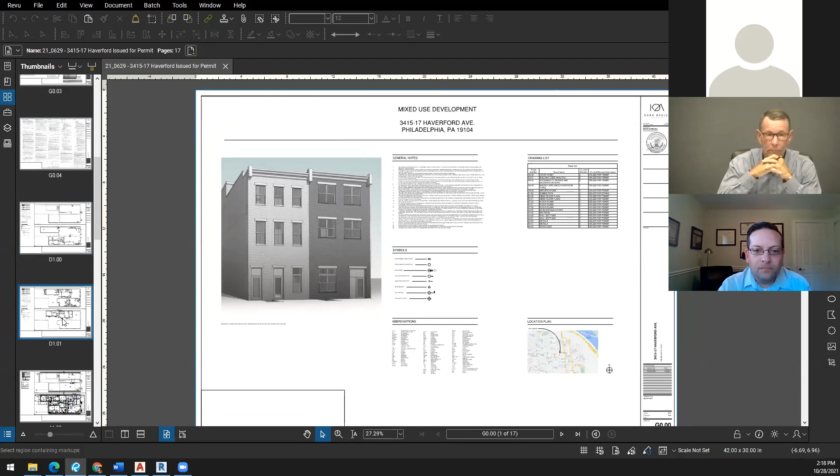I'm going to let Mark share his screen and discuss the plans. Okay, go ahead. Mark, yeah sorry, I'm getting it. All right, so everyone sees the drawings? Yes, we do. All right, so as Jared stated, this is two parcels with an existing unity of use.

What we decided to do was connect these at the first floor and independently move up throughout the building for either side on the units above. So at the first floor there's a commercial unit and two residential units. There are existing openings along what is currently a property line, but since we are using these as one parcel, we're hoping to seek relief for the windows' fire separation distance as they're shared in this courtyard.

And then as we extend up, the buildings do step away from each other further into the plan, so we do have alternating windows in that area as well.

Also, the rear yard of this property is 25 feet deep, so we do not have access to a right of way, and we do have bedrooms that open up into the central courtyard. We would say that with the sizable rear yard on this property, there's more than enough area of refuge for occupants to exit the building safely and be safe while they're waiting for rescue.

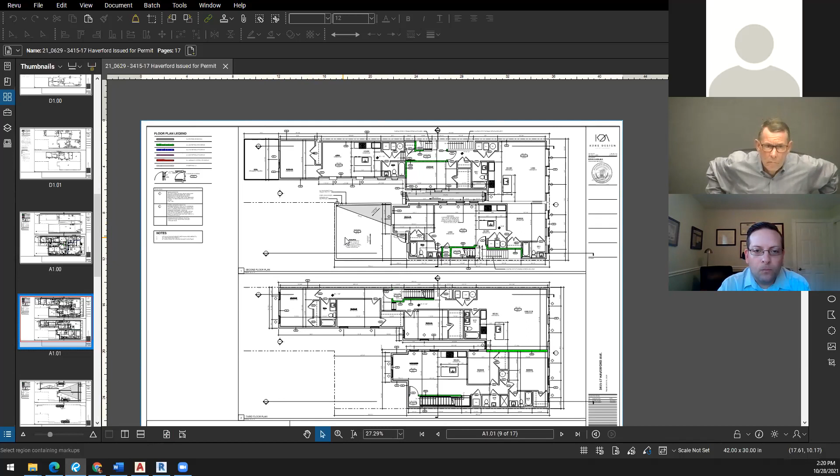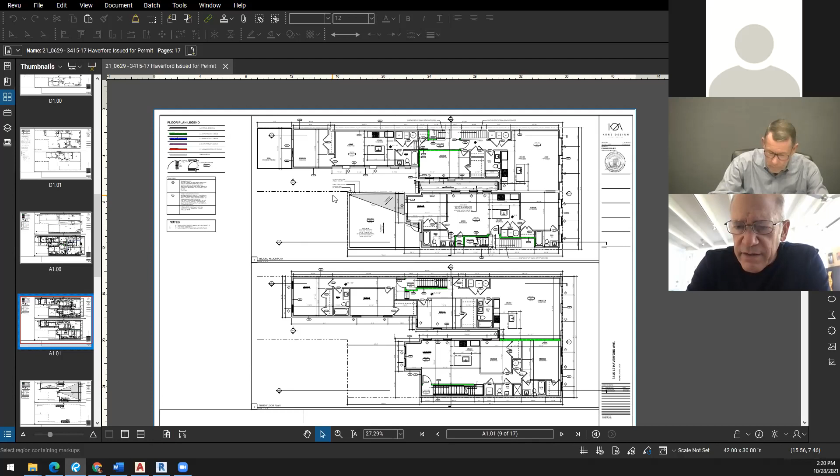Did you work out an arrangement with the parking lot to gain access? We have not. Is that something you'd be interested in, reaching out to them to see if we can maybe place a gate on the fence on that side? Yeah, and a recorded easement that allows access to that.

Yeah, we, 25 foot isn't enough. The standard's 50, so that's an issue for us.

Also, the biggest goal was to keep these buildings intact. The only way to provide access to the back would be to knock this entire building down. So the building is not currently sprinklered. We're going to fully sprinkler it in our proposal. We're more than willing to offer up extra sprinkler heads at all of the opening points listed in the refusal.

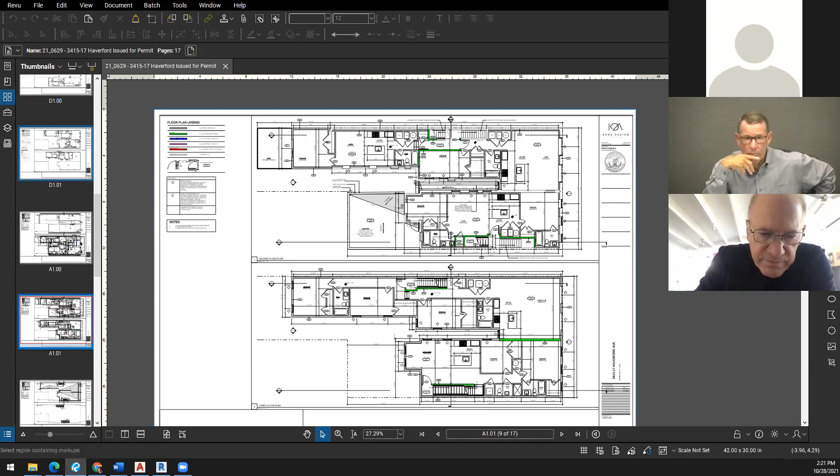Okay. Yeah, I think we're okay with the openings that are kind of between the two parcels, as long as this remains one building with unity of use. I want to confirm there are no openings that are problematic on either of the other property lines, are there? It's only the one between the two parcels?

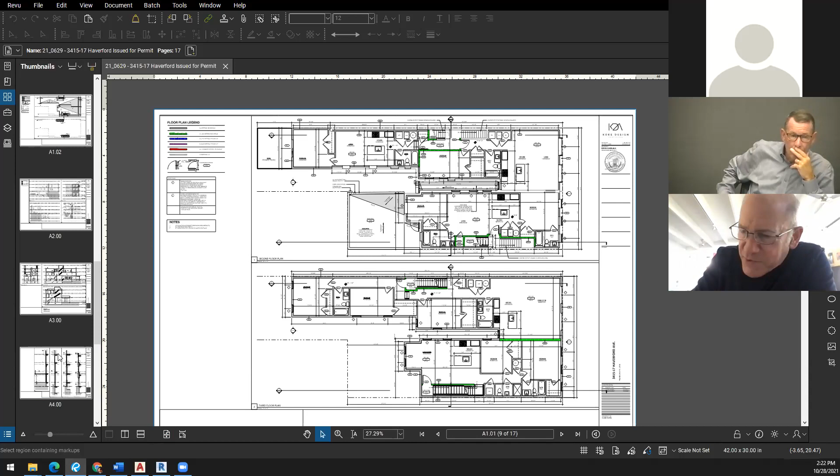That is correct, because the existing structure on 3417 goes all the way to the back property line. We have no windows along this. We do have windows along the rear of the other parcel, but again, that's a 25-foot fire separation distance. We're way under the percentage of glazing for that.

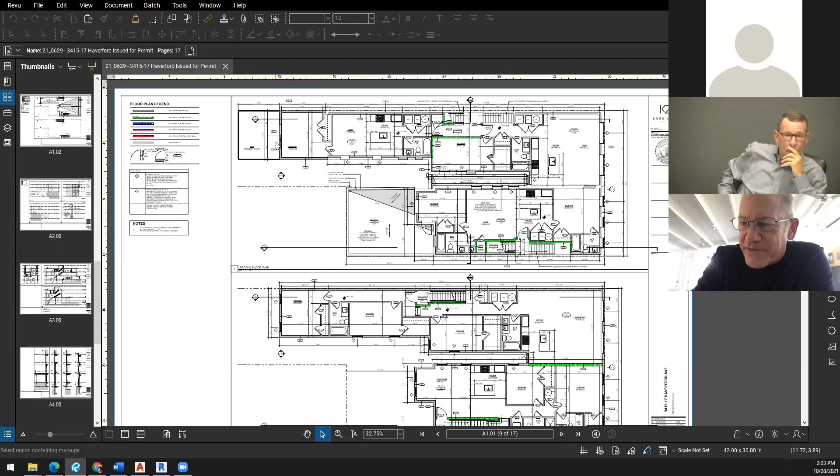I think, just going from our typical projects, we do have a concern with bedrooms dumping into the back without any way out. So I think we would have a proviso for a recorded easement to egress in an emergency through the adjacent parcel. The only thing we have accepted on occasion is allowing a tunnel, essentially tunneling back through a building where you're re-entering from the backyard and then out to the street. While that's not allowed as of right, we have typically accepted that.

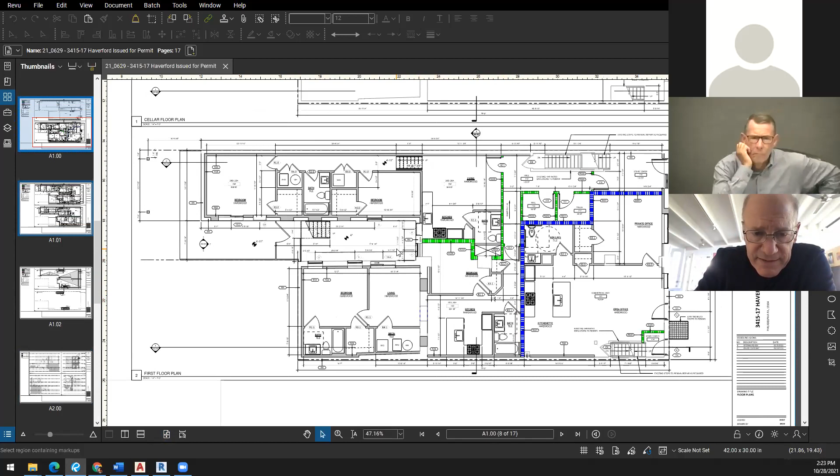We took a quick look at your plan, and that would obviously be problematic. If we were to, at this first floor, we have this 2-bedroom unit here. If we were to provide egress back through this space and into our egress enclosure through here, is that something you would be willing to consider? Still only one exit really at that point.

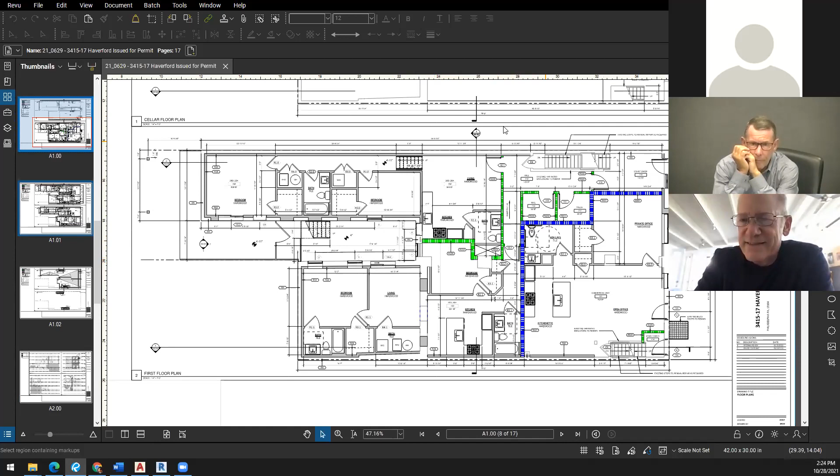We want to guard against the possibility that we'll have a recalcitrant owner of the parking lot who may refuse to give us an easement. So we'll certainly approach that owner about that, but it would be good to have a sense of what a plan B might be if that owner will just not cooperate with us.

So essentially, we would eliminate this bedroom and create the corridor all the way out to the front of the street. Could that corridor be next to the existing corridor there? At a certain point, I guess. One exit, but it does then provide egress out of that space.

I'm just wondering if that path could be isolated from the stair coming down. So essentially you're on a ground floor corridor that takes you through and out, with a doorway next to it. It's like a double loaded hallway there, right? Kind of where you have the red line, but carving out a little bit of what's there. In that case, it would be independent, I believe.

Is that true? The whole idea, Kevin, is if the stair is compromised and none of the occupants from the second and third floor level can reach the public right of way, having a tunnel alleyway that goes back into the exit enclosure to access that public right of way kind of defeats the whole purpose. So that's why Ted was stating to have a tunnel alleyway that's right next to it, as long as it's completely enclosed and has no penetration into that stair enclosure. That's what he was stating.

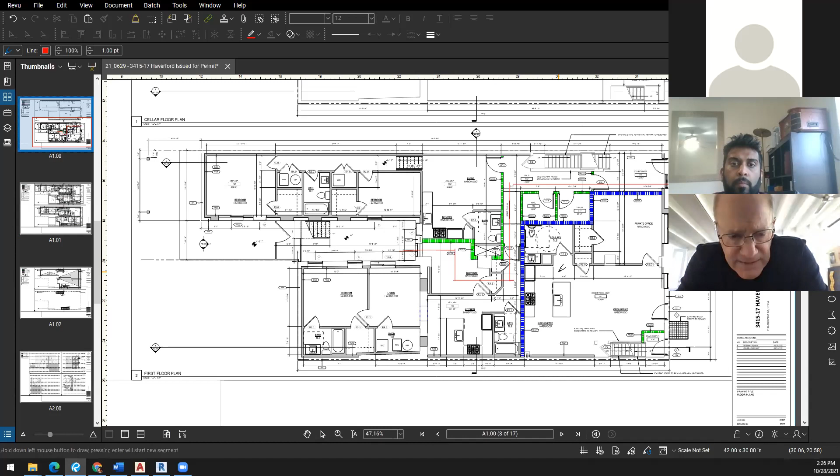Okay, sure, understood, that makes sense. Is the best process then, from an administrative perspective, to leave it open while we have that easement conversation? So yeah, we can continue it. Let's do that if you're willing, and we thank you for that. Let's do a reasonably brief continuance, and I'll reach out to that owner and see what we can do.

In the meantime, you might want to draw up plan B just quickly for yourselves, so you've thought it through. Of course. And just a process question on that: when we come back with a continuance, would we just present that plan, or would it be a new application? It'll be the same application. Right, okay, very good.

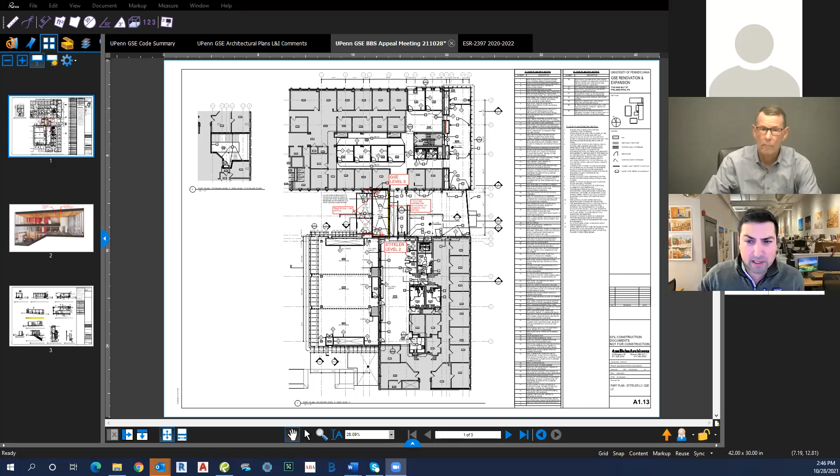Hi, can everyone see my screen? Yes, we can. Hi, like I said, my name is Josh Eisenberg, project manager with Ann Beha Architects here on behalf of the University of Pennsylvania. We also have our code consultant, Arthur Gager, with Jensen Hughes on the call, and a couple other individuals with the University of Pennsylvania. So what you're looking at here on screen is a floor plan, which includes the condition in question. The project builds an addition between the Graduate School of Education building, which is here to the north, and Stiteler Hall to the south.

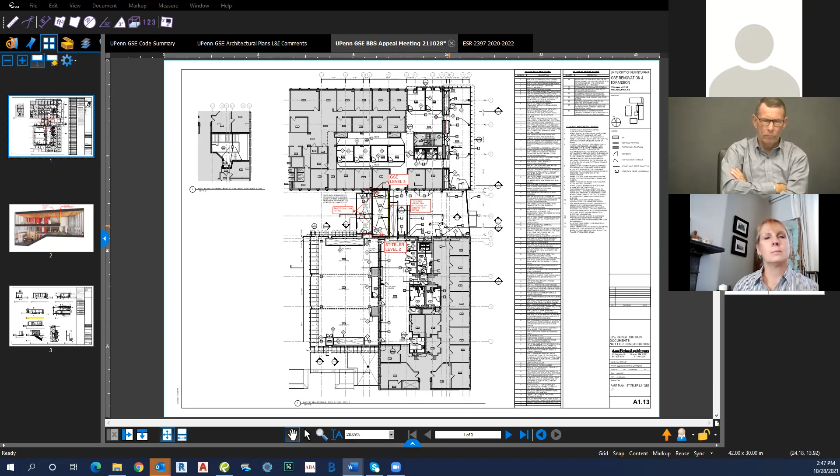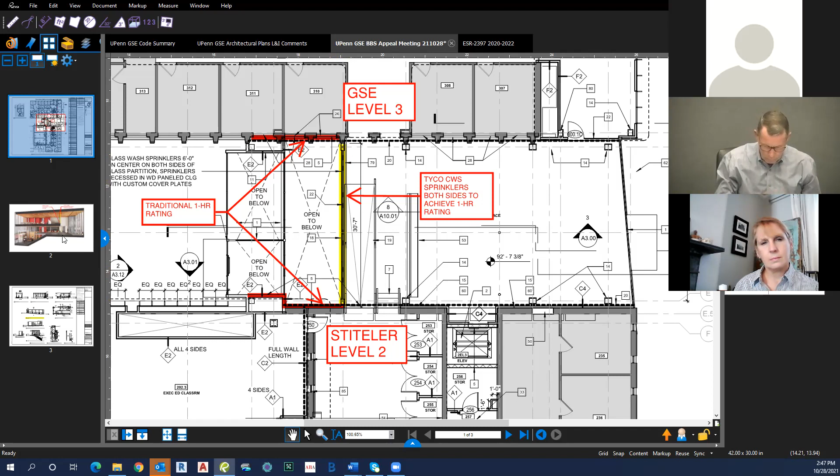So the upper level of the addition, if I zoom in a little bit, which is what we're looking at here, overlooks a double height space. And you can see two of the three walls separating the surrounding areas will be separated with a traditional 1 hour fire rating. The third here, which is a glazed wall, and this is the condition in question, is proposed to be separated with a Tyco CWS window sprinkler system on both sides of the glazing in order to achieve that 1 hour fire rating. And to give you a different kind of perspective on the condition...

This is a section perspective view looking to the south. This yellow line represents that glazed wall. The CWS window sprinklers would be on both sides of the glazing. And there's a metal rail that would essentially protect the glazing from pedestrians or storage on the floor side of the glass.

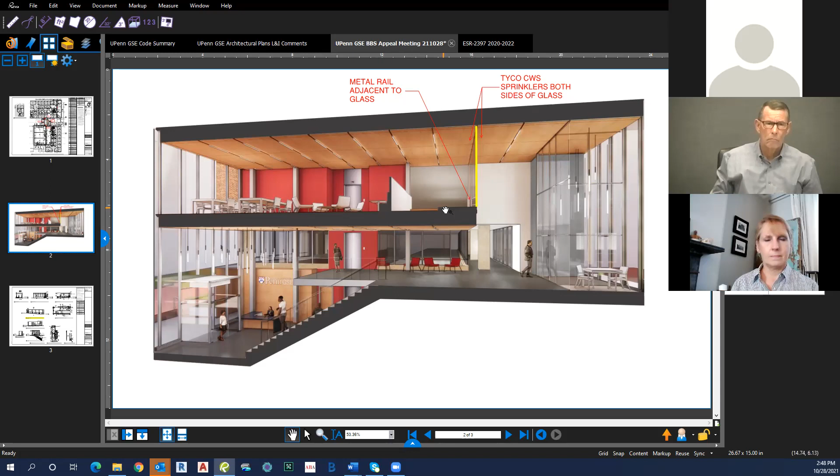And just the last drawing that we have to share with you is just an elevation of the glazing from that upper level looking back towards the glazing wall. So those window sprinklers would be on each bay in accordance with the ICC ESR testing report. And Arthur can get into, I think, maybe speak to a little bit more of the technical aspects of the ESR report, if that would be helpful.

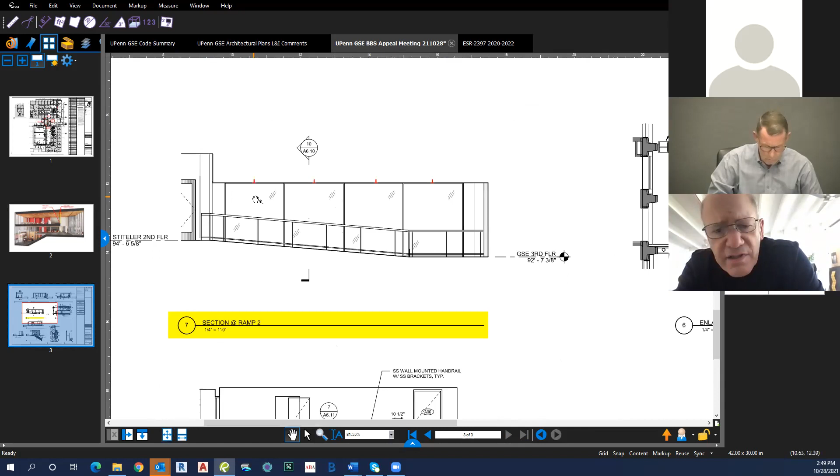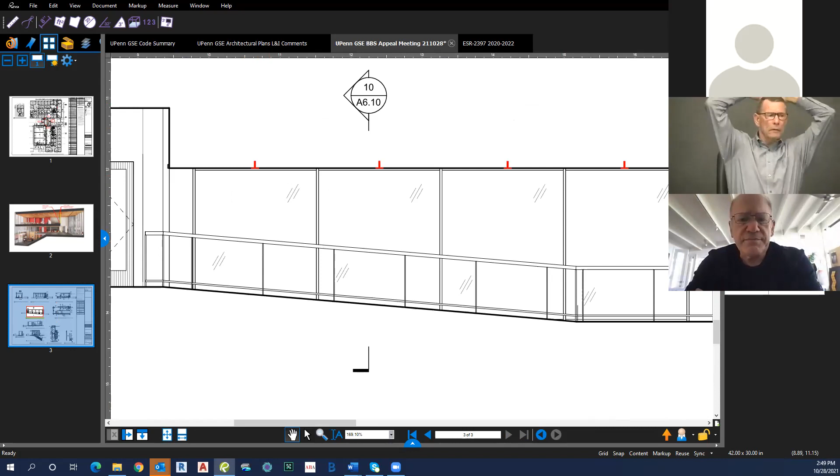Just one quick question, the 4 lights of glass there, what's the approximate width of those? Approximately, I think they're a little bit over 6 feet wide. The window sprinklers are tested basically, they require a 6-foot separation or a baffle between the sprinklers so that you don't achieve cold solder. Right, okay. Okay, thanks.

And you have them on both sides of the window? That's correct. Both sides of the glazing, that's right.

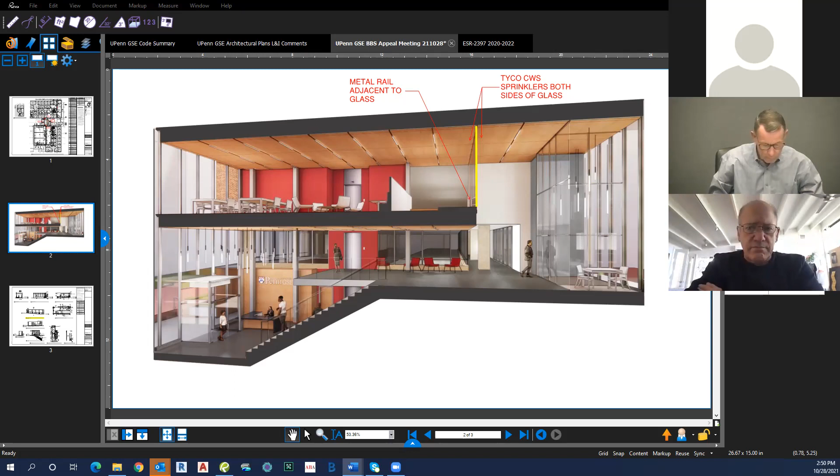Yeah, so I talked with Jay about this a little before, or a lot before this variance hearing. It sounds like you are, you know, I thought you got some people here were at least aware of the sprinklers, aware of the approach. It sounds from the questions I've just heard, it sounds like people here are relatively aware of the design system, the ESR, and the product data sheets. Our plan is to follow the ESR and the Tyco WS or CWS data sheets really to a T. We're going to use, we're planning to do a full height metal rail.

I guess coincidentally and luckily, this is next to a ramp that has a metal rail next to it for a handrail. So the intent is to pull that handrail all the way down and have a kick plate along it to prevent combustibles from ever hitting that glass on the occupied side. So I think what we're doing is, you know, those are usually the issues we see with this approach, like how you're keeping combustibles from the glass. Are there any questions about this, or other thoughts or questions you might all have?

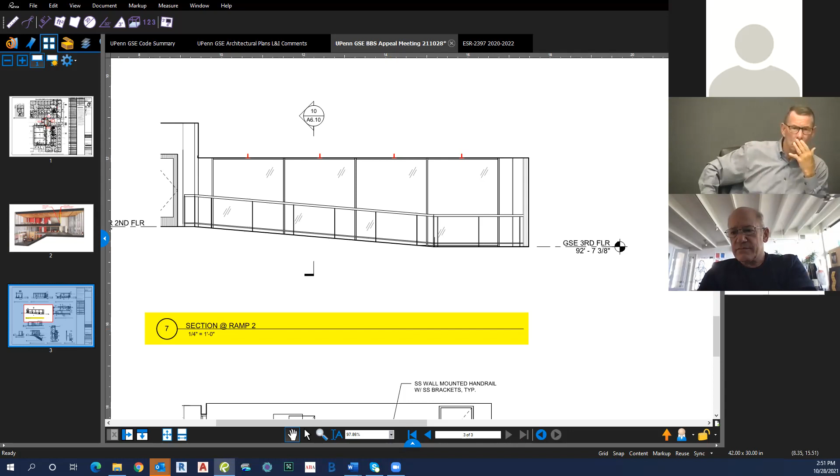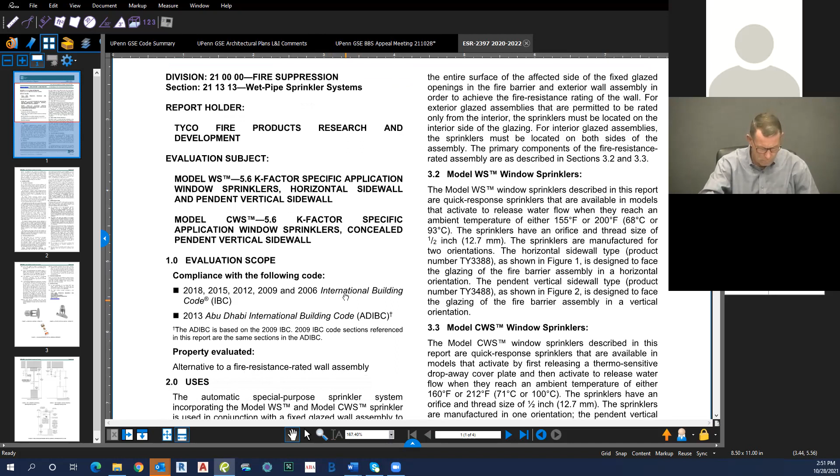And do you think by sprinkling both sides, that gives that a rating of an hour? With so the system's been tested with this ICC ESR report, it goes over the testing, and you'll see that it will reference AC 385, which essentially says you have to comply with ASTM E119, except you're using sprinklers in lieu of a gypsum or traditional CMU or brick wall. So it will - that includes a hose stream test, unexposed temperature rise, really everything.

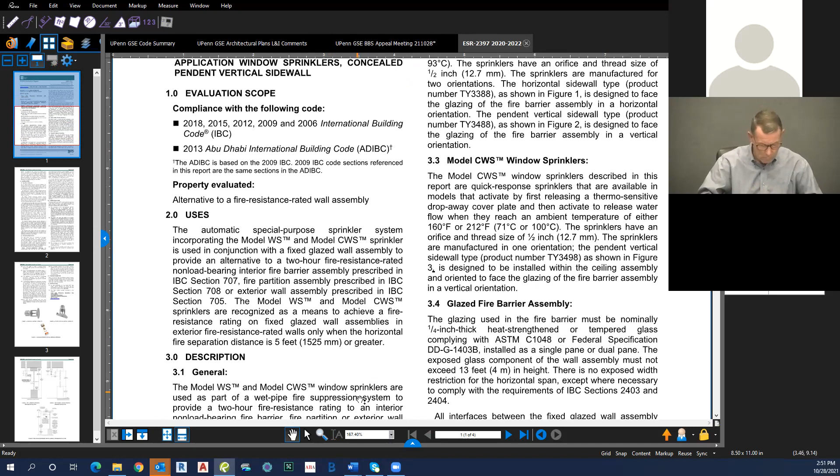Anyone have any other questions? So basically, you're saying this is just as good or better than a 1 hour rated wall, this design. It's kind of like the performance-based approach, right? It is, yes, and I think it's a little bit better than a traditional performance-based approach where I might just offer my insight or my thoughts, which you could agree or not. There is this ESR, which ICC has really supported, so this has been tested and listed by Tyco to be an equivalent.

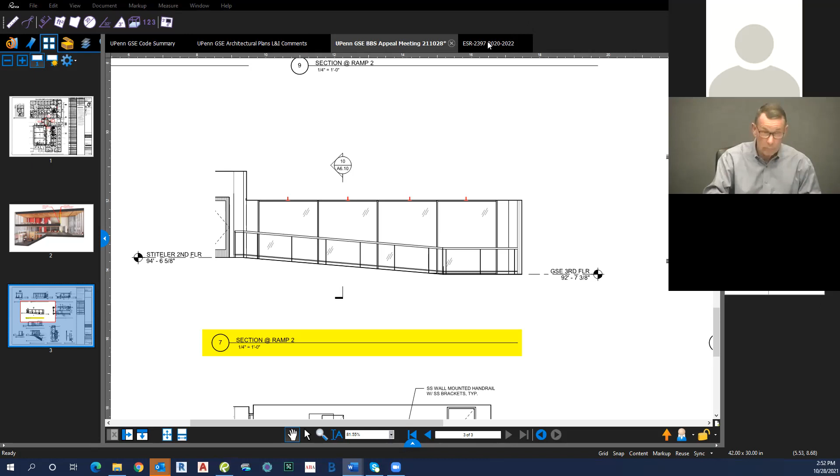Okay, I mean, that's what we usually look for is a listing on this. So I don't have a problem with it, guys. I mean, it's up to the board, but the fire code doesn't have a problem with it. I don't have a problem with it either. So if that means anything for Ted or Amy. Yeah, I'm fine. Amy, you're muted, sorry. Okay with it. Okay, all right. We're good with it.

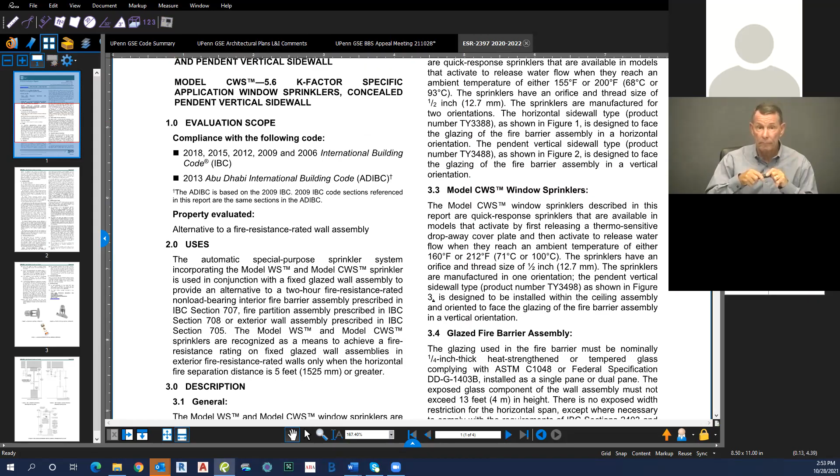Okay, that's it, right? All right, guys, good luck. Thank you. Thanks. All right, you're welcome. Sure.

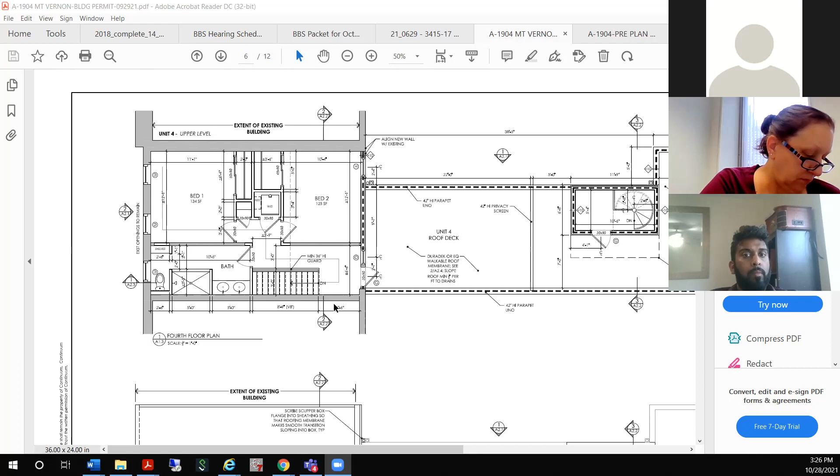So that's our first variance. Any questions? Is there any hardship, or is it just you wanted?

Just simply the proportions of the lot being just 19.9, to add a second means of egress to serve a single unit.

And serving 2 units, the one in the front, the one in the back on the 4th floor. No, there's only one in the front on the 4th floor. I thought there was a rear bi-level too. No, oh, it's all roof deck, okay.

Yeah, we purposely kept it to 3 stories back there. So it's really just in the existing building, 3rd floor front. We designed it as a bi-level unit, that's 3rd and 4th floor. There's no other 4th floor being proposed.

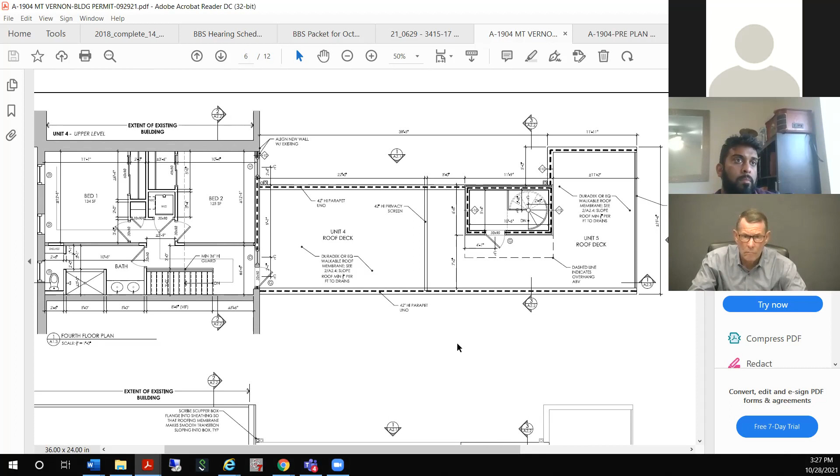And Judy, is the 4th floor being reconfigured in that unit? It is, because right now it's a single family. Right, so we're turning that third and fourth floor into a unit. Right, the bedroom that's up there.

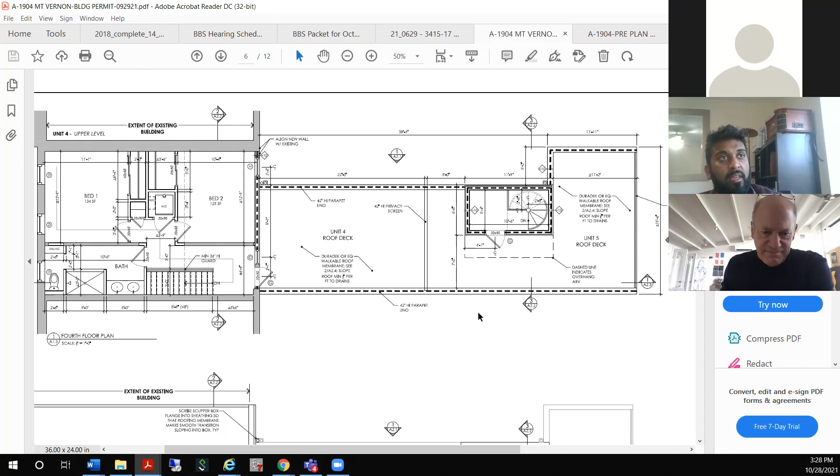Understood. And Judy, I actually discussed with the board members the email that you sent me regarding the window well in the basement level, and the landing. The landing you were talking about, that's the existing landing going into the property, right, from the street?

I'm not quite sure what my question... oh no, I know what you're referring to. Sorry about that, the stair going into the basement, you'll see it. Oh, right here. Yeah, in my drawings, whatever's gray shaded, that's existing building. We were keeping all that in place.

However, he brought up the question about swinging that door in, but we made the decision to change that door out, swing it out, and put a 60-minute door there, because the building plans examiner brought up, which the preliminary plans examiner did not, that he wanted us to enclose that stair going down to the basement.

I was hoping we could look at that as well, because if I'm looking at the existing building code, what I was thinking of in terms of this is that when we are changing the use, I can give you the whole code stream here.

The plans examiner was citing 1023.4. Yeah, that's usually the unfortunate thing with this, because it's going from an R3 occupancy to an R2 occupancy, and that's an increase in means of egress hazard category, and that's the reason why means of egress was addressed that way.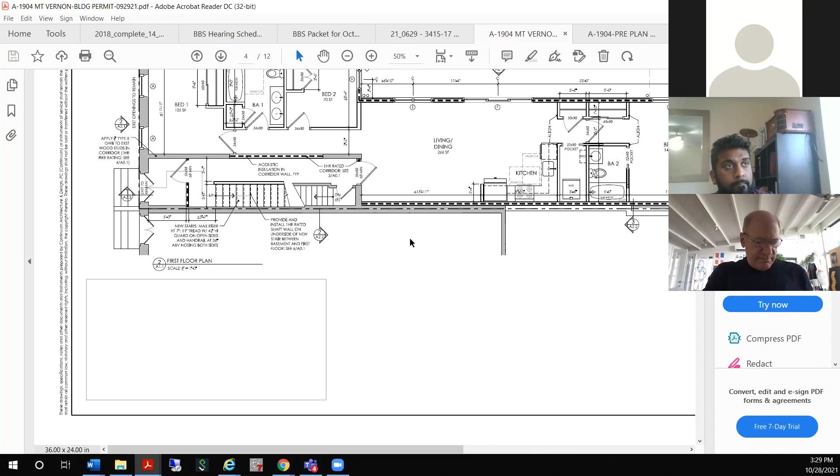Yes, but what I had sent him, and I haven't heard back yet, was that in that means of egress to a change of a higher hazard, it directs you to say stairways shall be enclosed in compliance with the applicable provisions of section 903.1. 903.1 takes us to 802.21, and it says it's applicable only to openings connecting 2 or more stories.

And since it's an existing stairway, we're closing off the whole downstairs, doing the shaft, putting the 60-minute door at the top of the stairs. And you're not changing the occupancy of whatever was down there anyway? It's still being used... exactly.

As a storage facility. And then I also found another exception in the IBC, 1019.3 exception 2, and it doesn't quite apply, but it says you're not required to have that enclosure if it's contained within an individual dwelling or sleeping unit. And obviously that's not the case here.

Okay, yeah, but it's its own thing, it's just for storage and utility. Okay, so I was hoping we could talk about that one too.

Okay, I think the main thing was the means of egress that the board wanted to talk about, and then we could talk about the other variances. Yep.

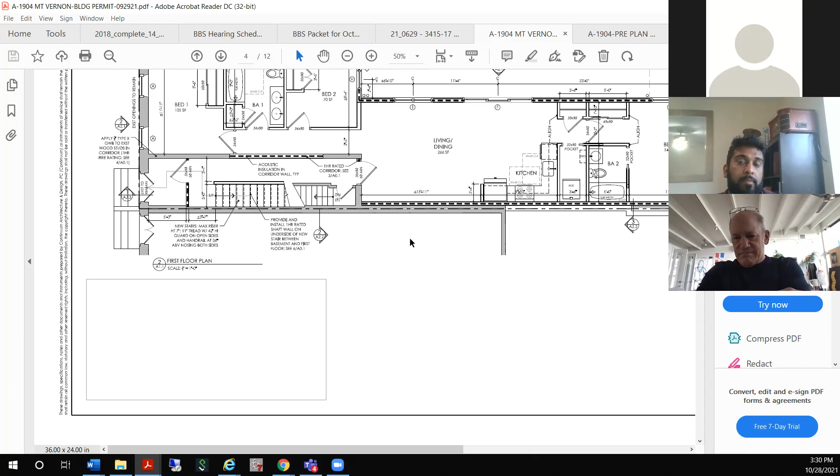So any questions? Well Judy, I think you mentioned it, but I just wanted to reiterate that in terms of hardship, the building is historic, so we don't have the luxury of creating a second means of egress in the frontage because it's protected. That adds a complication that might not necessarily exist with other similar buildings and footprints.

But is there access to an alley at the back, however? Not to the alley, but to a rear yard. And how deep is the rear yard?

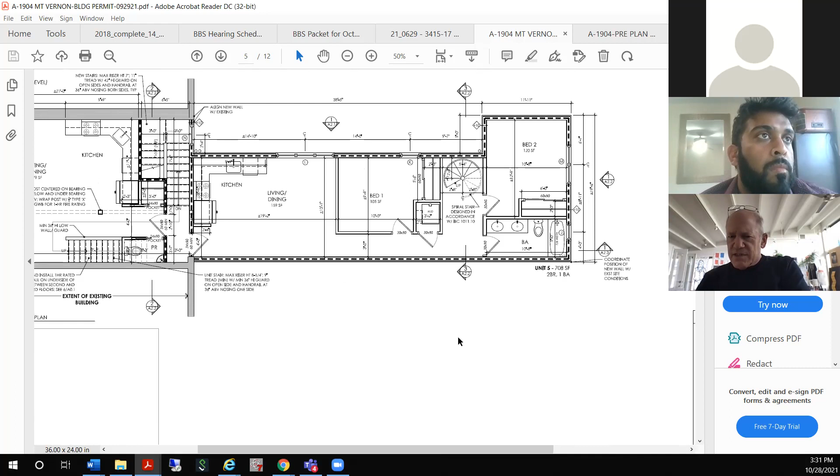If you scroll back, let me scroll back to the site plan. Here, I have... here, there we go. It's about 16.4.

Oh sorry, but wait, but it says existing alley. Oh yeah, there's that alley back there. I'm sorry, yeah, I just don't feel like it goes out anywhere, like adjacent neighbors have cut it off.

How far away from your building can you get in the alley? You can, if you're willing to march through all the dead possums and tree branches, get to 19th Street. But you can get out there, right?

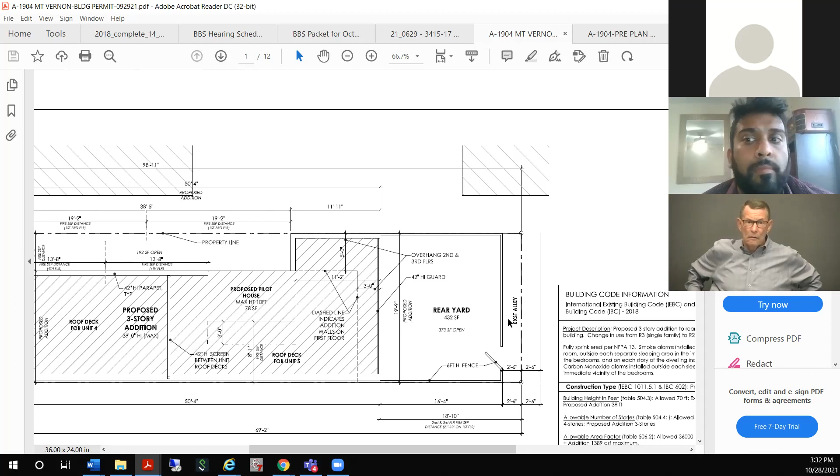You probably could find a way out, but the 4-story isn't located back there, so that's not even where we need the second means. We need the second means in the front, but you need it from the 4th floor and from the roof deck.

Well, the roof deck is part of the unit, right? But it's on a 4th level. So are you saying, Ted, that where we have the pilot house for that rear unit on the 3rd floor, that even though it's the private roof deck for the unit, that needs 2 means of egress off that?

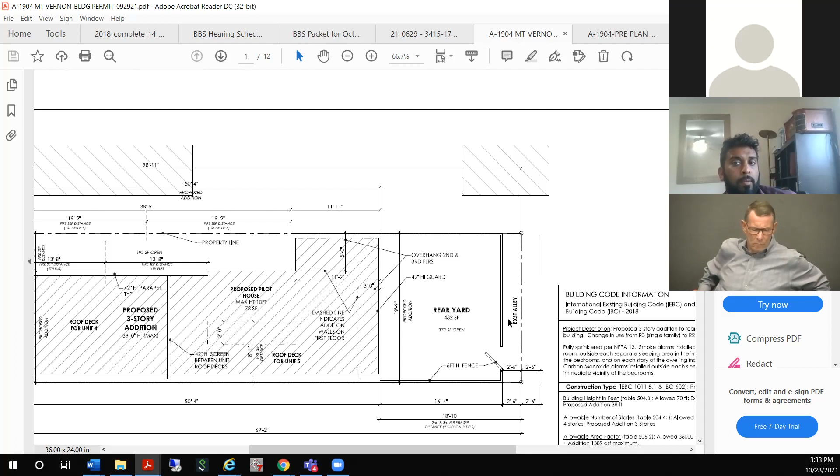Not the pilot house, but that roof deck does. The front portion, even though it's existing, is reconfigured, and the use has gone from R3 to R2. So in 2009 code, bi-level would have meant a second means of egress wasn't required, but in 2018 code it is required, even if it's bi-level.

No, and I totally understand that, which is why we did the preliminary plan review. But in this case, it's an existing building we're working with. We didn't build a 4-story building, and I think we've done everything we can in working with that 4-story building to meet the intent of the code. The travel distance isn't that far.

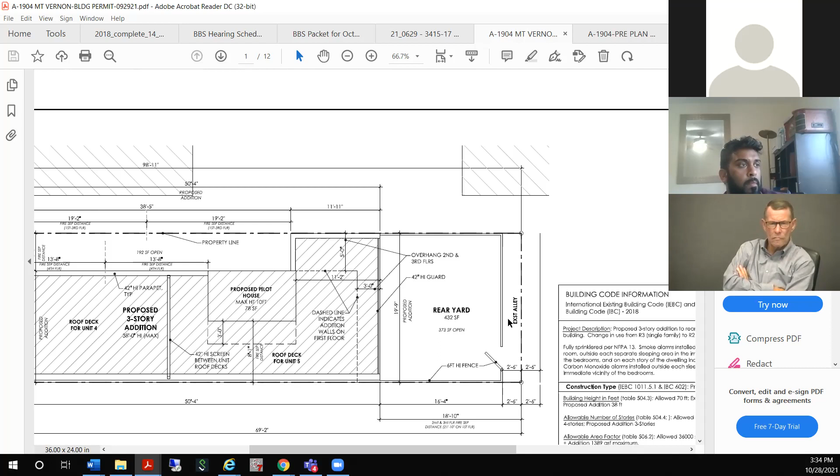It's 71 feet 3 inches to the stair enclosure. This sounds silly to say, but it's kind of true - we're not lopping off the 4th story to get rid of this problem. I know that's kind of an inverse way of thinking about it, but...

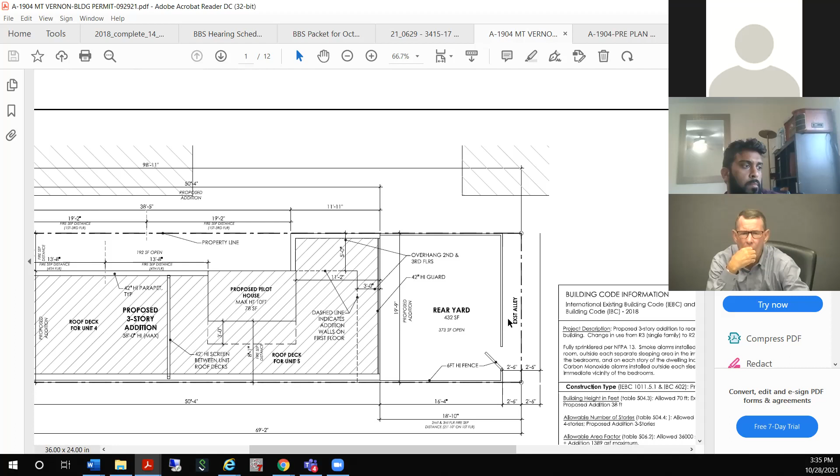I'm just looking on Atlas. I don't see any alley at all noted at the back - stopped. Atlas doesn't show any lines of an alley at all anywhere along those back yards. But it is written up that way in the deed. Okay, that's where that came from. I didn't remember seeing it going anywhere either. I just think it was overtaken.

But you guys shouldn't be penalized because somebody else has closed it off somewhere else down the line.

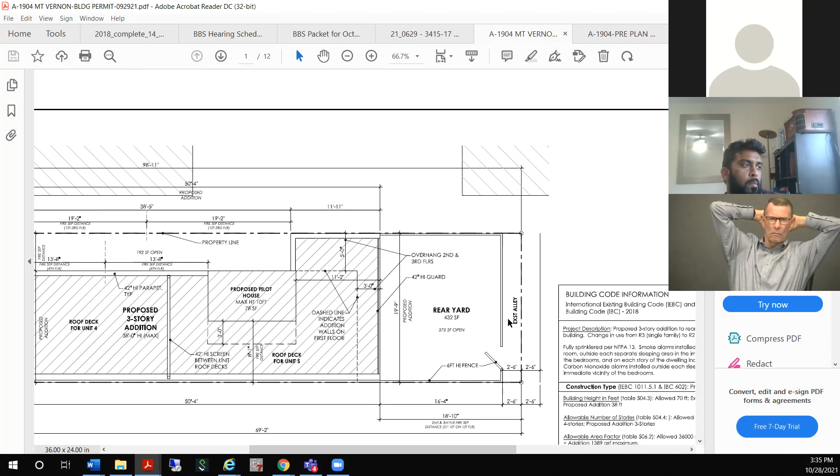We don't have a problem with the exit well in the basement, but we do still have a problem with the second forms of egress, and we're going to need that. We'll make a variance for you to use a spiral staircase - it's a lot easier and cheaper if you want to do that. It'd be in the backyard, and you'd have to put a gate between the 2 roof decks so the front unit can come through the roof decks and hit a spiral staircase into the backyard.

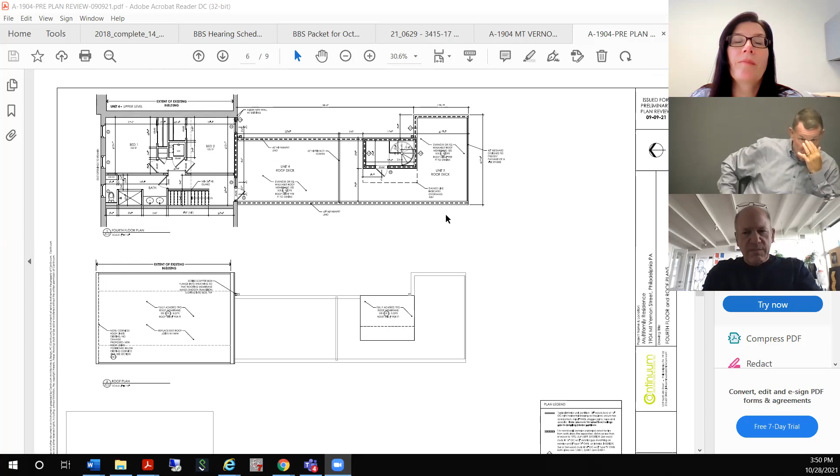Okay, but that's only if there really is an alley they can have access to. Isn't there - this might have gone away in 2018 - wasn't there a part in the code about if the depth of the rear yard was like 10 feet, as long as you could get 10 feet away from the building? Judy, it's 50 feet. 50 feet. Geez, how's that from my memory?

So the board members are saying you'd have a gate between, so you have access for this unit, go across this roof deck, and then put a spiral stairway in the rear here. I think that sounds reasonable, but do we still run into the issue that we don't have a way out of that backyard?

Well, you said there is an alley, but it's full of dead possums or whatever. If you can get out to 19th Street, then it's viable. But if you're telling us you can't even get out to 19th Street, then it's not viable, because there's a building on 19th.

I'm Googling it. I have it up on Google. Do you want me to share screen? Yeah, if you can get into the alley and get 20, 30 feet away down the alley, even if you're blocked, as long as it's a deeded alley... I can't share screen. Oh sorry, I'm going to stop my share. Okay.

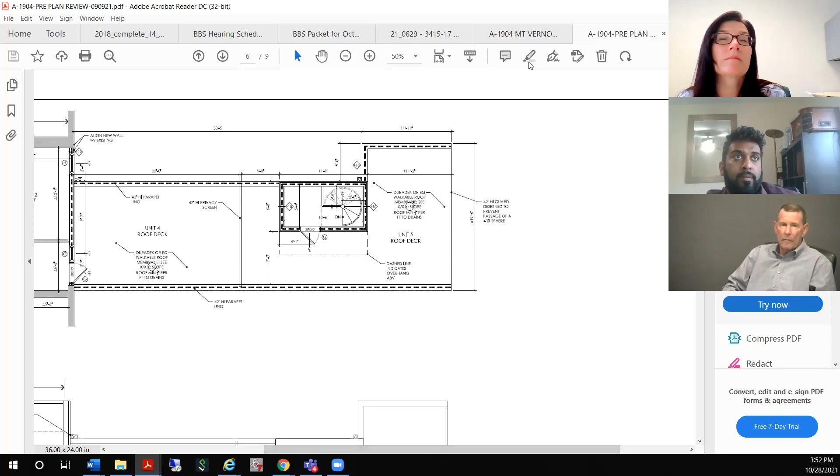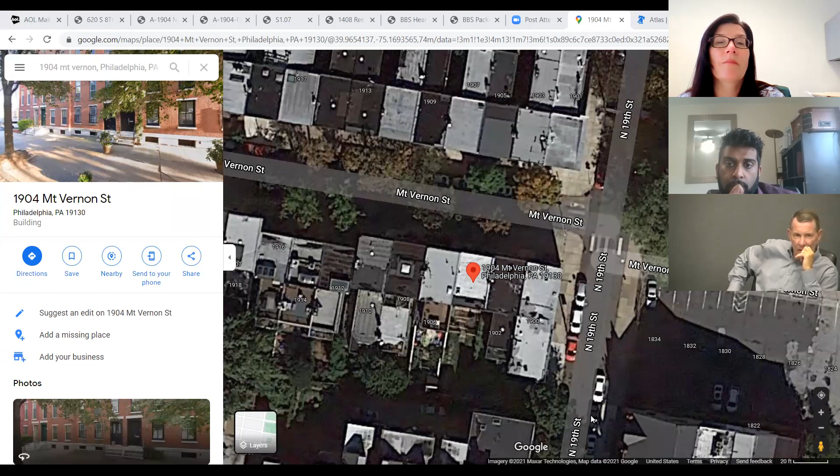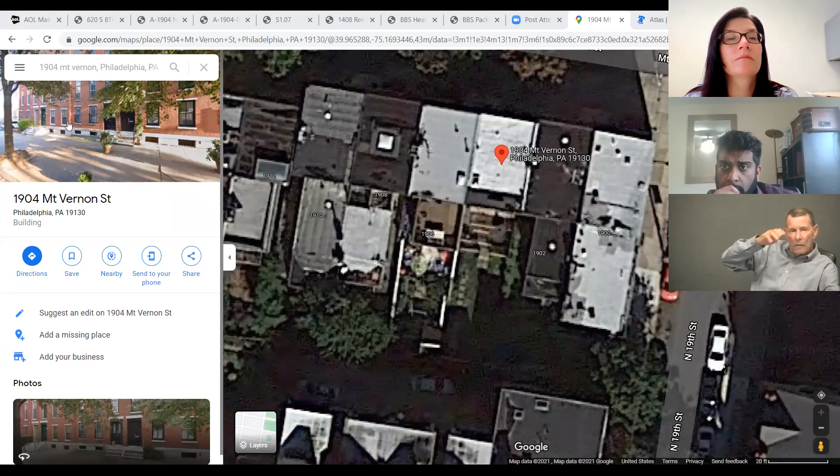Maybe we can get to 19th Street. Now, if it's here, and if there is an alley back here that you can get to 19th, then it's viable. I'm looking at 19th Street - if you get yourself to 19th Street, there's a little gate there between this single story structure and another brick structure. This gate - not that one. If you go past the red doors... I just messed up.

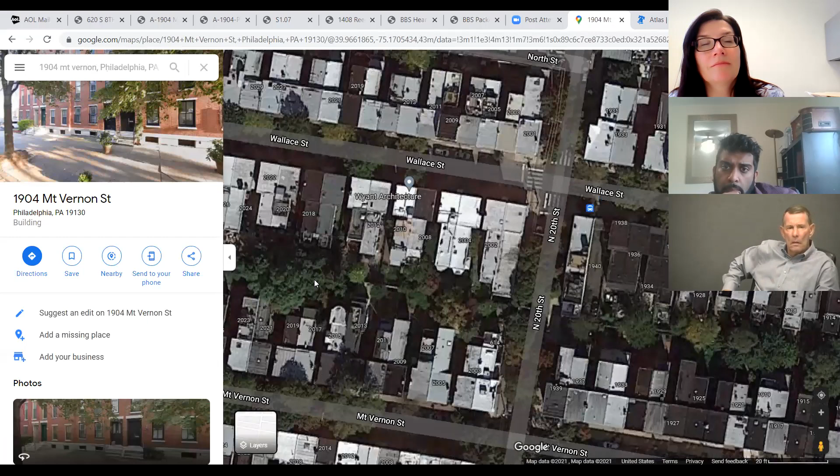Now I don't know where I am. No, you're at the right spot. Keep going down 19. Okay, now turn yourself around. Go a little bit more. A little bit more. Okay, right there.

Is that the alley gate? Does that sound right, Mike? Looks right. Can you line up with it so we can see how far we can see? I'm not going to guarantee there's not a whole bunch of crud in the alley, but legally, it's an alley.

So Mike, what do you think about that idea? If we put a spiral from the deck at the rear, can we get those plans up again, to the third floor or the roof deck? I'll let you do that.

Judy, would it be possible to drop the spiral off their roof deck straight down at the side there? I think that would be really tight. It would be nice if we could do that, but per code, the diameter has to be about 5 feet, and we only have 5 feet. You need that for your fingers.

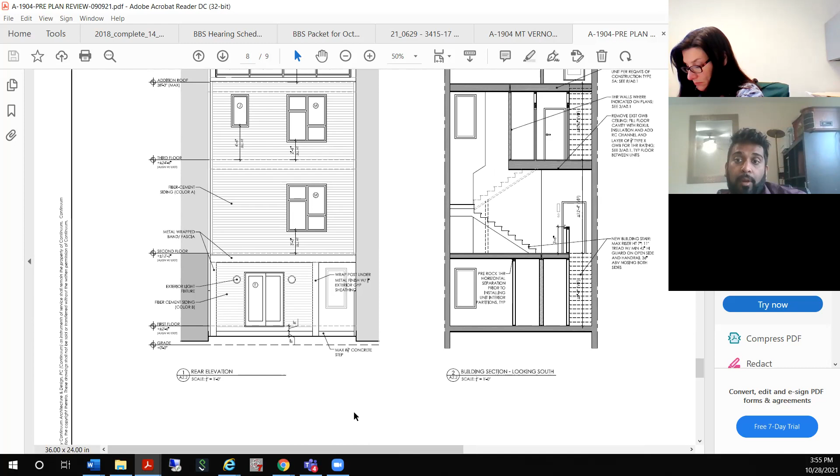I think the board is giving you the variance for it to be closer than 10 feet, just make sure it's non-combustible. The thing is, I think what you said, Judy, was that it's 5 foot, so you guys are going to be pretty tight. I don't think you want to go over that lot line, or you might have issues with the adjacent neighbor.

Mike, we'll just have to make some adjustments, like where the windows and stuff are in front of that window.

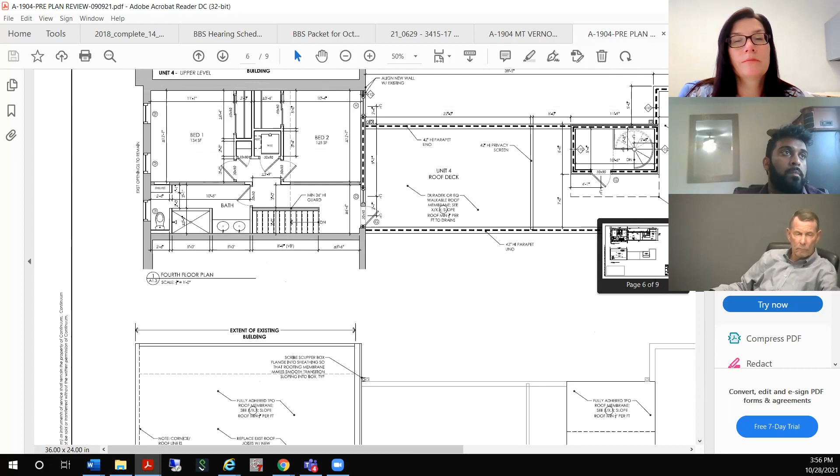Are we okay with the other issue the examiner brought up, enclosing the stair in the basement? We said the means of egress will be okay, but how about that comment about enclosing the basement? You should enclose that basement with 1 hour there, but you don't need to provide the window well per the variance per the Board of Building Standards. So you want us to enclose that basement stair, even though the whole basement is now 1 hour? Because we're doing a 1 hour ceiling down there.

The other issue is, if you open this all the way up to the basement level, that will be considered 4 stories, so that whole exit enclosure is required to be 2 hours. So if you don't close off the basement - we did. I purposely made that whole basement enclosed in 1 hour and separated from everything else, the existing, with the 1 hour ceiling, the shaft wall. But are you saying that if we don't actually put that stair in a shaft, then the whole shaft enclosure is required to be 2 hours?

Okay, so we'll enclose that then. We'll figure that out.

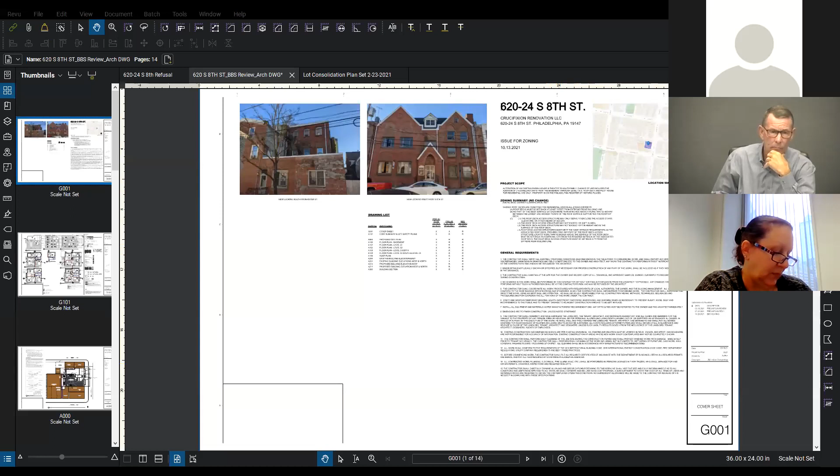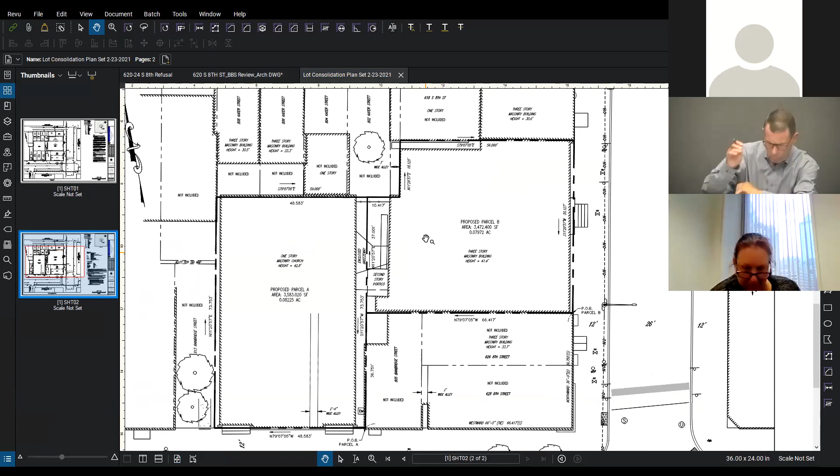This is regarding the northwest corner of this building, an existing condition. On the survey, there is a 3-foot listed alley that appears to go to Kater Street. However, the neighbor to the north has built over the alley, and this portion of the building is landlocked. Jumping over to the site plan, this alley is now landlocked by property lines - it can't get to the rest of the property that connects to an alley going to Bainbridge. It's really landlocked from the north. Across the way is 802 Kater Street, which is currently unbuilt.

In plan, based on the unit layout, we're doing 4 units per floor. The worst case is really at this basement studio in this corner - all its windows currently would only go out to that 3-foot alley. Most of the remaining units have access either to 8th Street or to the rear, which connects to Bainbridge. In other cases, we laid out the units to push the bedrooms toward the rear yard, which has access out to a public right of way.

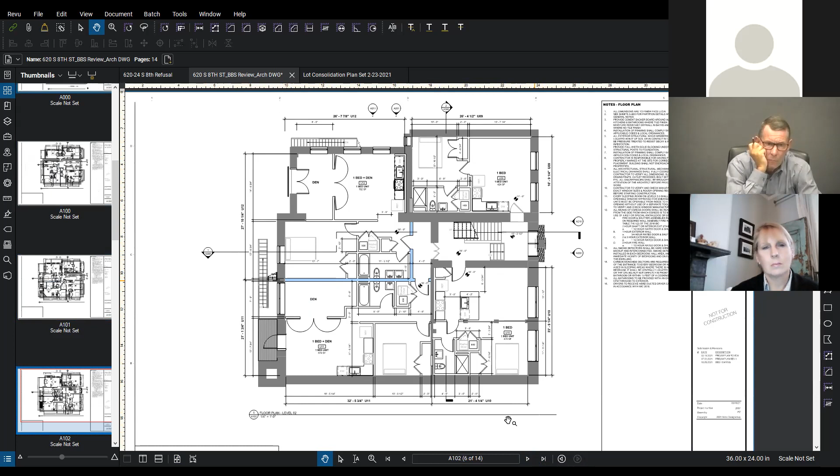This would be the 2nd floor, similar situation - there is a unit here with a bedroom whose window would again connect to that landlocked alley, though it does have access to 8th Street through the living space. To clarify, this is this piece of the building here, and this is the alley that does not exist anymore. This building, if it was to be developed, would have a rear yard, so potential to...

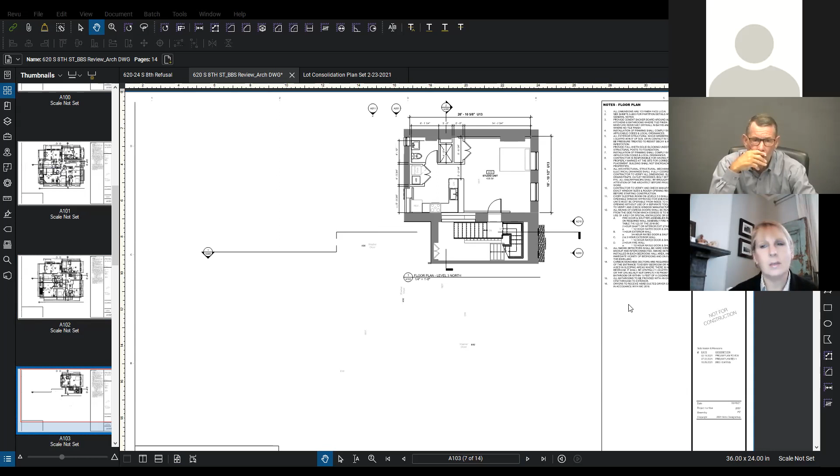Can you see a JPEG? Yes, we can see Atlas. Perfect. Okay, so this right here is where the RM1 is, basically where the corner of the building is located.

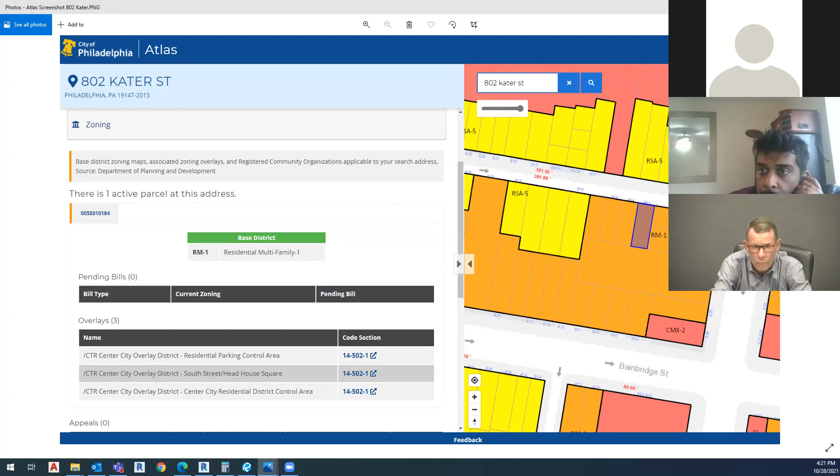Another screenshot of Atlas. Again, this alley here does not exist anymore, but the zoning of this lot would always allow for a rear yard. So there is potentially some potential that if you needed to get out, there would be exterior space for you to go.

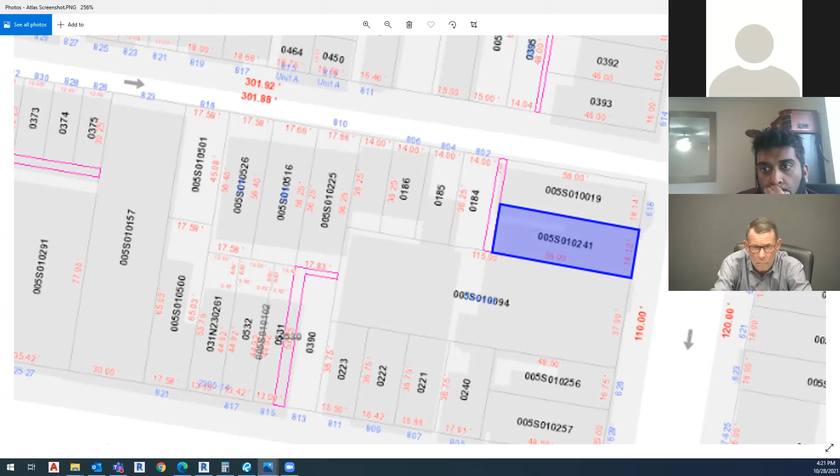So we're looking to understand if you've come into these situations before and any recommendations of how we could deal with this. Julie, can you go to your ground floor plan? This is the ground floor plan.

I was just wondering if there's any way of getting a vestibule or something in that odd corner to get from the one alley to the other alley, like in that corner. Yeah, there's a current existing chimney here, it's not in use anymore.

Some of our concern is, another piece of history, this portion of the building was an addition. The other portion is the 1887 building, and this was added later. So we're pretty confident that this is likely a load-bearing wall. It would be great if we could somehow make a passage from this 3-foot alley to our alley, but it would be a pretty big structural take to make it.

No, it's not that bad. Conversely, could you get from the alley that's blocked off to the backyard and then into the alley that does go south?

Yeah, Matt can correct me if I'm wrong, but I don't believe the neighbor has really given us permission yet to scoot over here and then scoot down. Ideally that's what we would like to do, but I'm not sure if the neighbor will be amenable to granting us that easement. I did speak with the neighbor and they were pretty aggressive in regards to not giving up much there. So we have gone down a path of investigating that. I'll leave it at that.

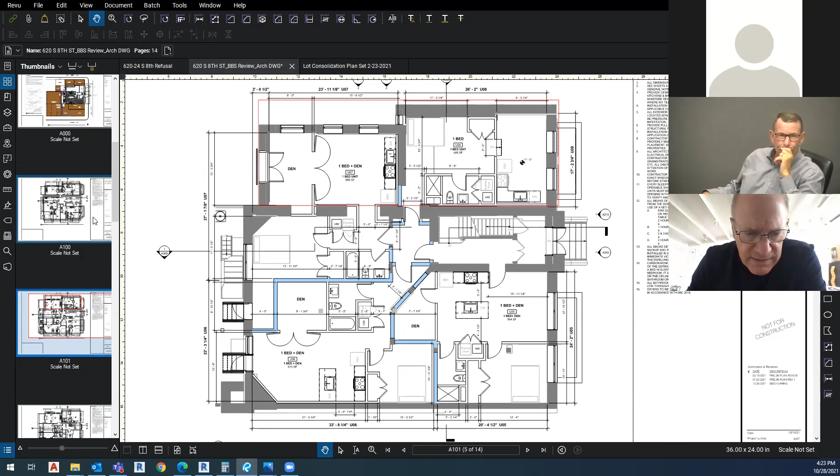Okay, what else can be done? Which level are you showing right now? This is level 1. Actually, in this unit there really isn't a bedroom here.

It's really, I think, probably the main one is the studio unit, and this is based on the building's footprint and its existing windows. To make the project viable, we really are hitting the maximum of 4 units per floor, which is allowed by code, and we really want those 4 units per floor.

And the basement obviously gets pretty tricky for getting in light. So there are these existing previously filled up window openings on this side that really do offer light for a basement unit, but they just don't offer access to a public right of way. We're also using the existing openings in this party wall currently.

So all of these bedrooms in the basement don't have the egress well that they need? No, just the studio unit 3 in the rear. There will be egress wells added on 8th Street on both sides here.

There's a window about here, one in the bottom left corner. We will be adding a light well in the rear yard, and that will lead to the basement, the Bainbridge Alley.

So it's really just about this corner of the building. The basement is this unit. Above, this currently is more of a studio, so it could enter the front.

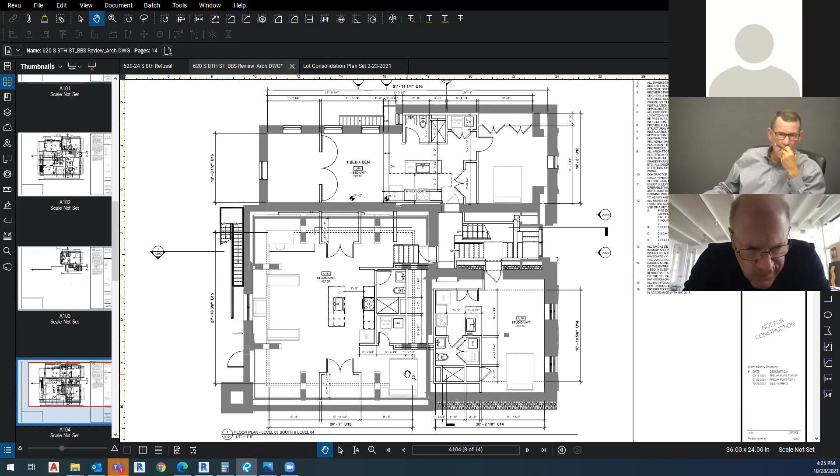So it's a minority of the units, and we do feel that adding a sprinkler system in the building definitely makes it more safe. The existing building code doesn't technically address emergency escape and rescue openings in the section of the code we're using.

It also notes that as long as you have a maximum of 4 units per floor, it can be any number of stories, which somewhat implies that if you were above 4 stories, where an emergency escape window is no longer really usable, it would still be allowed. Yeah, but if you're above 4 stories, then you need 2 exits. That's the reason why emergency escape isn't required.

Yes, I guess our reading of the exception, though, is that it says any number of stories. It doesn't actually have a limit to the number of stories in the existing building code.

What is that upper left that says 1 bed, 1 den? This is the den. Is that unit just those 2 rooms? This unit is the whole bar. Oh, the whole thing, come in okay. Here, yep, this would be the bedroom. This is your living with like a den office. Okay.

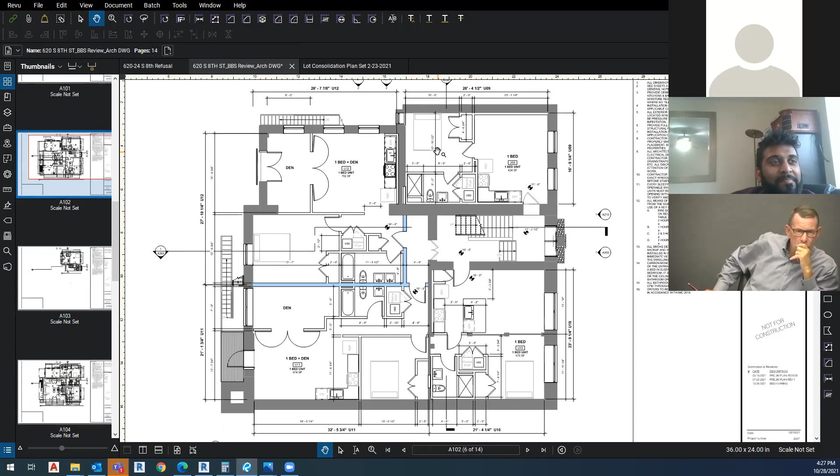And the one below it is just one huge 1 bedroom? Not even, because the bedroom's not closed off. It's a studio? This one is a 1 bedroom. And then on the ground floor, we're sort of showing it more of a studio layout. There's sort of a floor level change here. No, the 3rd floor. Oh, I'm sorry, when I went below, I meant below in plan. Sorry, the 3rd floor, yes, it's a studio.

The location of the unit entry sort of changes based on the stair configuration. So when possible, we were trying to make the living area up front. But depending on where the door is, some of them were better laid out as studios, to give a mix of unit types.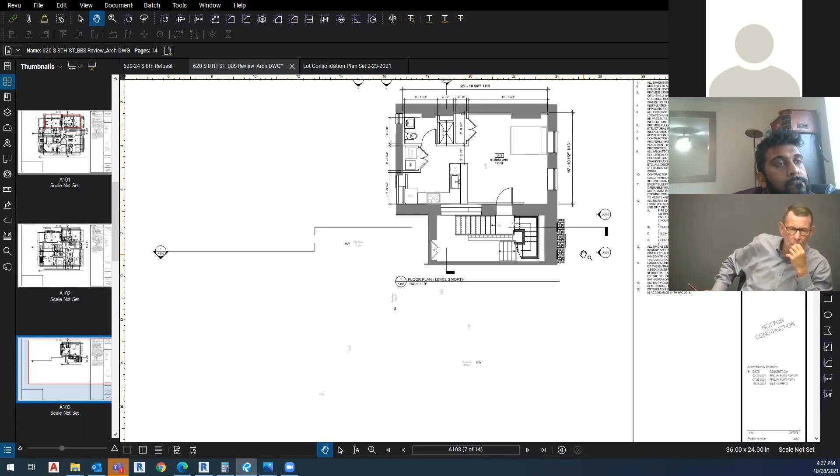Are the separations between units 1 hour, or are they sometimes 2, just because of the masonry or existing conditions? I mean, existing conditions, it is a type 3B construction, I guess you'd argue, combustible floors, but obviously the exterior walls are all masonry. So being that this is a party wall, I guess you could argue in a lot of cases it is a 2 hour between, mostly this portion. Granted, there are openings in it. But any new walls will be, per code, only required to be a half an hour.

But the stair, since it connects to the basement as well, it will be 2-hour rated. But that upper left-hand corner, it only gets out to the landlocked alley. Is that one? Which floor is that? I'm sorry, this is level 2. Yeah, if you're level 1 of that, I guess it's sort of mostly masonry construction, but not entirely there. Okay.

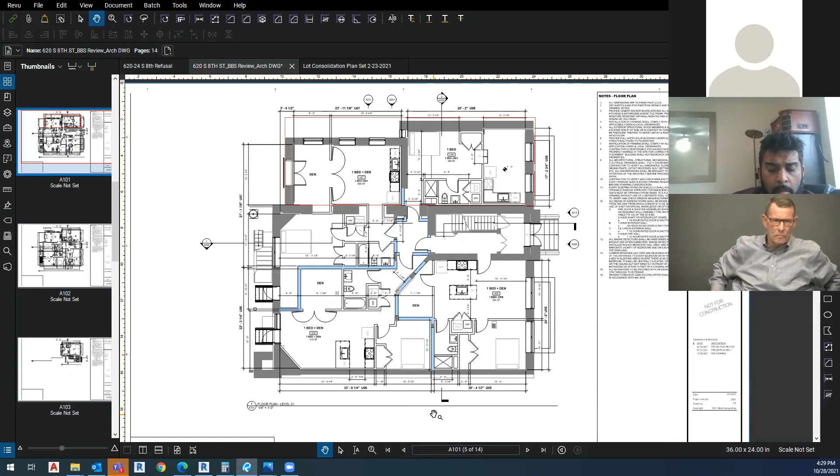And 13R sprinklers, is that what's intended? We're actually doing NFPA 13. 13, okay.

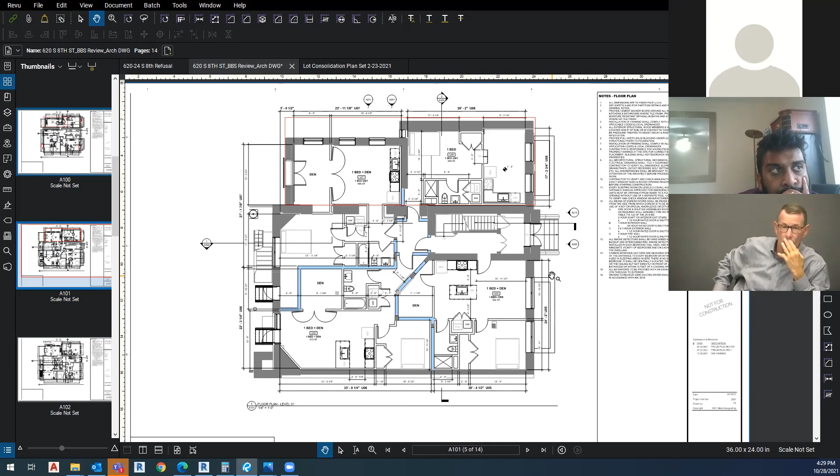Why don't we caucus? Agreed, okay? Deb, Michelle, you guys in the waiting? I'm here. Okay, just 3 now.

Unfortunately, the only way we can see doing anything is to chop off a portion of that corner to make the ability to go into that alley and get to the back street. Or you have to try to have some type of an agreement with the other people to get to that alley to get out to the other street.

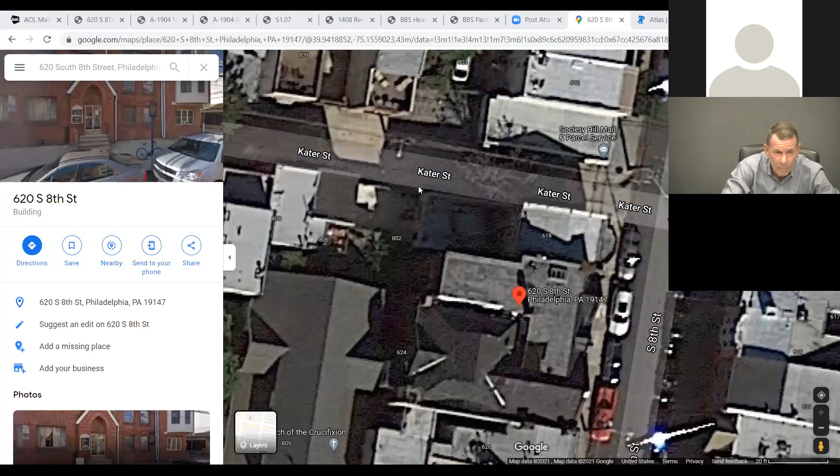The one where you showed the gate, yeah, that goes straight out. And where does that go, to Carter Street or Kater Street? We could see that, let me go back to that. There's a gate out to Kater Street, and the back of this house has a window and a door, so...

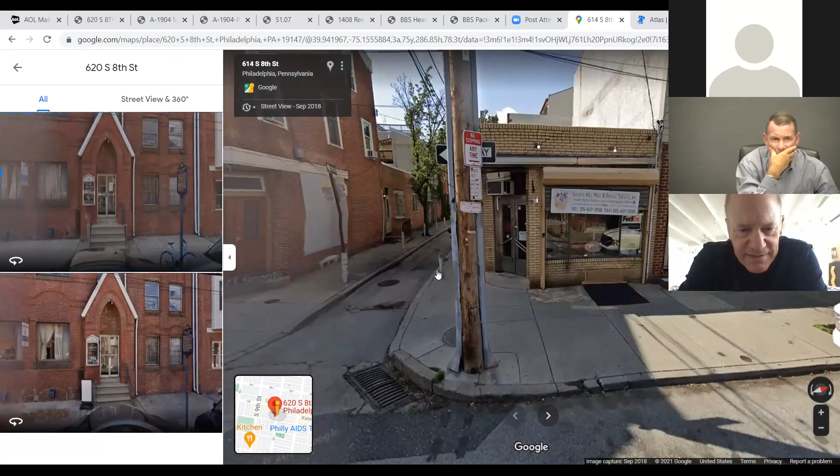And you're saying they built over the alleyway, but what do they have access to? Here's the back of that, you're saying it looks like a long time ago they got built out over the alleyway, but then there's an access here. I can't zoom in at any other angle.

That goes to your building, which is, I believe, this building. But does it just go to somebody's backyard? It just goes to 802 Kater Street. It's just a property, again, private property.

Well, yeah, this is totally illegal, what they have going on, between an air conditioner sticking out a window on a property line, a door on a property line. Yeah, there are multiple offenses there, and obviously they've created quite a hardship for this condition, which at one time was viable, right? There was an alley, and these all had proper egress from them, and their overbuild has caused this hardship here.

But so Amy, to your point, is the suggestion more the sort of internal passage, like we were initially talking about, that sketch, sort of where that chimney was, to create some kind of internal hallway or something to get around inside the building and get to that other space? Is that the easiest option? Unless you can convince the neighbor with the backyard to give you an easement.

And if you did that, they wouldn't have to meet the 36 inches? Yeah, if you carve out that corner, we'd want 30 inches for a width, at least so there's some ability to get out. It wouldn't be to the normal letter of the code, which is 36, but at least it'll get you out. Okay, but I still think there's a bedroom or two that still don't have any window or emergency egress.

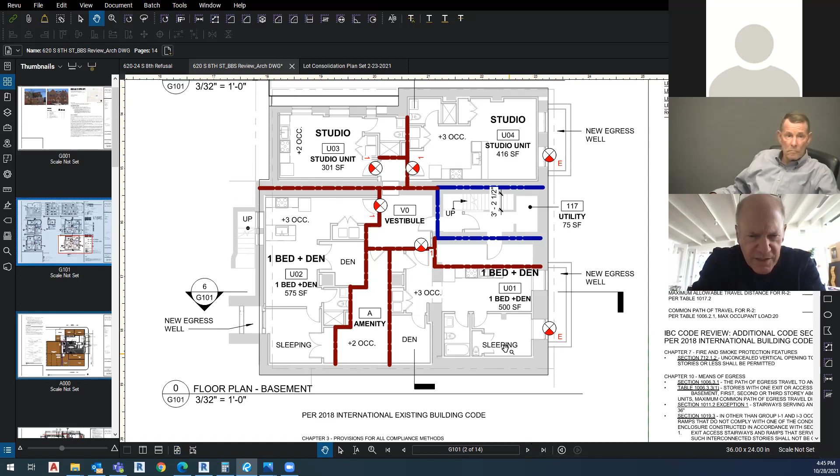Okay, go to the next floor. First floor, that sleeping room at the bottom of the plan. Our argument was that because this has rear yard access, there really are two means of egress from the unit. Jace, is that viable? Yes, there are two means of egress from that unit. Okay, I thought the bedroom itself had to have a window.

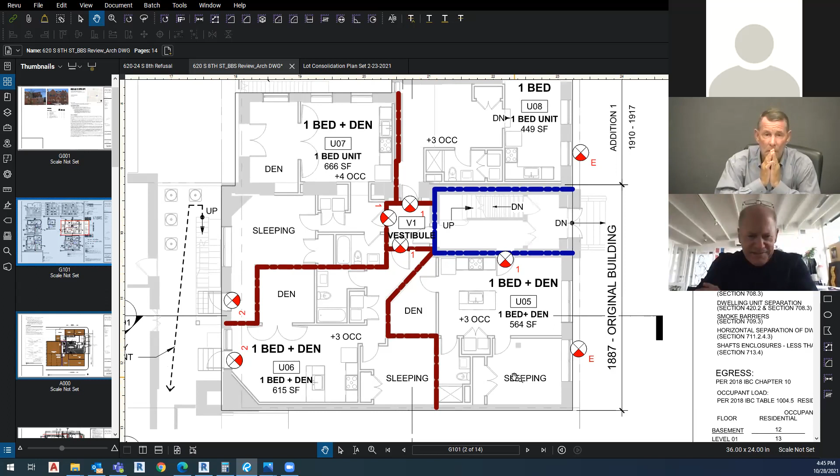Second floor. This is similar in that the sleeping room is recessed, but it does have access to a balcony and then connection to the fire escape.

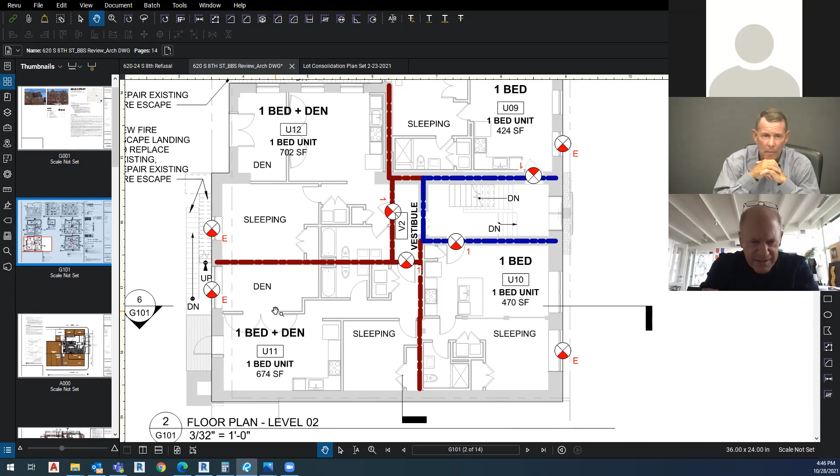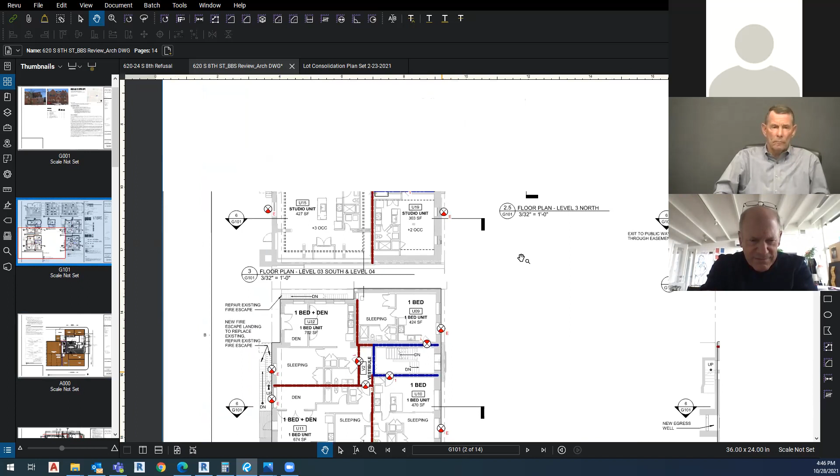This sleeping unit would have access out to the rear. And then this unit here, its sleeping area only has window access, but there is an existing fire escape, so ideally we would go out this window and connect over. This is the front window. That's all, it was more that window, that sleeping room on the second floor that concerned me.

Were there any other issues, Jace? I think it was just exterior wall opening percentage. We actually had one more thing - I think you sort of might have answered our question, but the alley width to Bainbridge is narrower than 36 inches, so that also generated a refusal for the project.

You know what it is - at foot level it's 28 inches, and then above about a foot, it's 32 inches. It's basically a condition of the foundation sticking out a bit, but there's a little more room above. That's okay, I think we'd be willing to grant that variance. Yeah, it's certainly passable, we've been back there a few times.

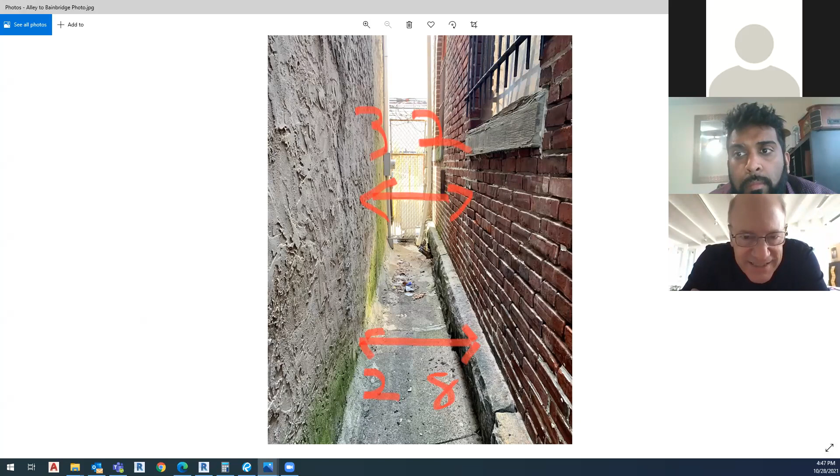Is that it? Then the last one was the exterior openings, as Jace mentioned. So are they all just existing? Yeah, they're all existing openings that are being restored, and that was part of the historical discussion as well.

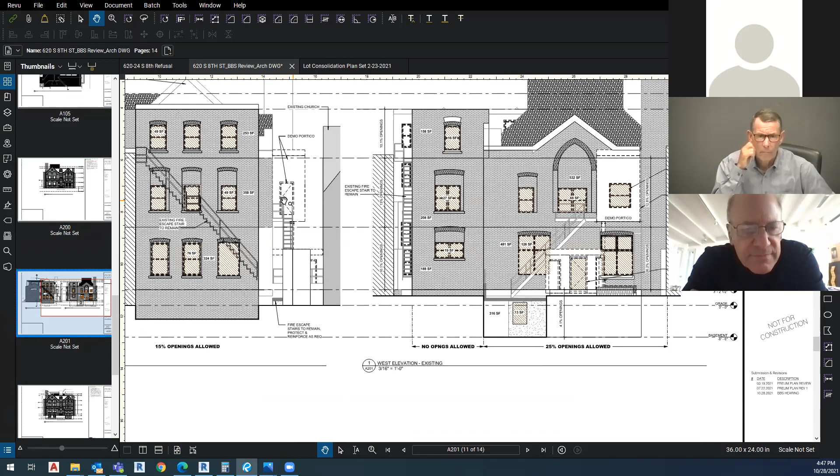You can see here, this is the original opening - you can tell with the arched brick above the window. We're really looking to open those back up, but because of our property line, we will be increasing the openings. Obviously existing openings are grandfathered in, but would historic openings also be grandfathered in? We're also lowering the sills at this west elevation, keeping the existing width, but lowering them to provide Juliet balconies.

Since we are sprinkling the building, we could also look to center sprinkler heads above these openings as well. The west elevation faces that alleyway and the rear yard - this piece is the alleyway, and this is the wider rear yard. Oh, and that corner is right there where we're saying we'd lob off something at the first floor. Correct, there'd be like a vestibule here. I think that's okay.

Can you put sprinkler heads at all the openings that are too close to the property line? Yes, at the windows, sure. Anything else? Those were the only three items. Okay, good luck. Thank you. You're welcome, okay.